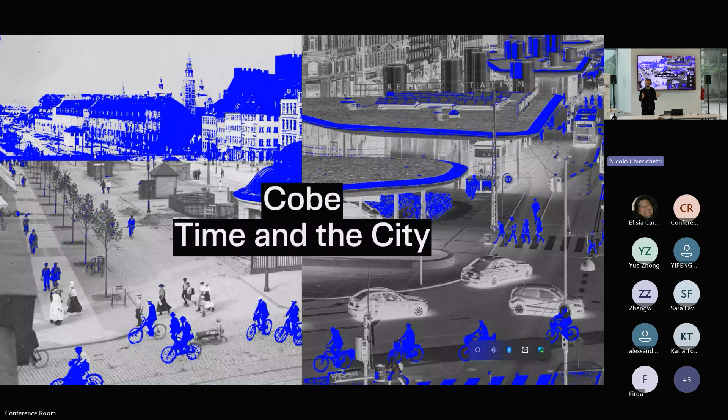So at the core of all of this, the urban environments, I think it's so important to discuss how infrastructure and mobility shape our lives, shape our society, and how important it is that when we invest in mobility solutions, in infrastructure, it's really part of shaping our daily lives.

So looking back at the core of all of this: why did we start building all these cities some 1,000 years ago? At the core of these discussions lies the very important promise of creating good lives for the people living in cities, and I think we should remember that in our work. The way they started structuring the city was around the experience of time—how much time it took to get from home to work, from home to school, etc. That became the base for the discussion of building infrastructure and mobility within our societies.

Then, 100 years ago, there was a major disruption—the Holy Highway, the highway to anywhere, where suddenly distance was not a problem anymore, because we invented the car, we invented the highway, so we could live far away from the center where we might work or go to school. This created a massive sprawl. The city started growing intensely across the landscapes, and we've continued that tradition and are still doing so. I think that's a major problem for thinking about a more sustainable world—we really need to start rethinking infrastructure, and that modernist project and lifestyle around modernity is at the core of this question.

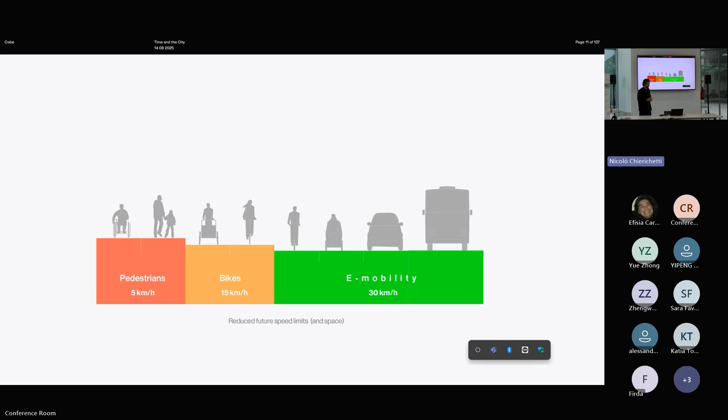There's a lot of thinking here that we could learn from, and we did these collages on rainbows of mobility, where we start looking smarter into all these smart mobility forms, and rethinking the usage of all the infrastructure we've already built.

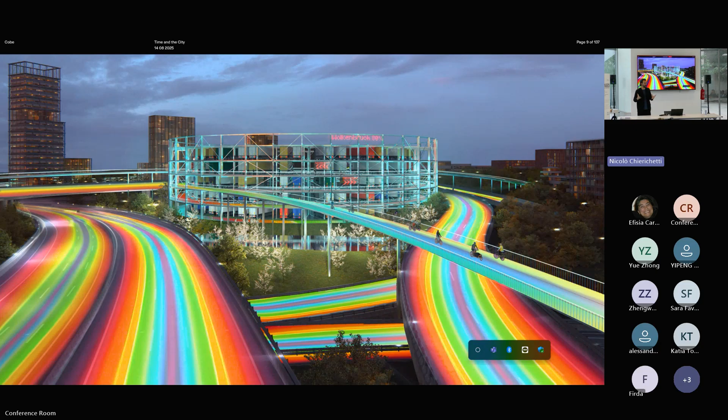That is also to really tackle the problem of not invading more natural landscapes than we already have. But when we talk about urban life in relation to natural life, we actually need more time within nature. We need to slow down more. We need to have more time for thought.

I'll just shortly tell a bit about our office. I don't know how many of you have been to Copenhagen within the past five years or so. Okay, not that many—that's good, then there's something to tell. But you should really come and visit. I think it's an interesting case of a city that completely changed over the past 20 years. But I'll get back to that.

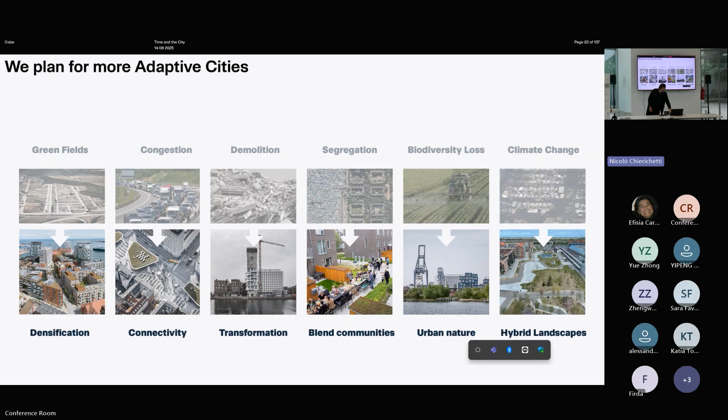At the core of this, we use Copenhagen and we learn from Copenhagen. We talk a lot about how the city transformed, especially around mobility, the core of it being the bike culture of Copenhagen that became a core new narrative, but also how the city changed its landscape. The harbor of Copenhagen is completely swimmable now and has become an enormous new recreational quality for all the inhabitants of the city.

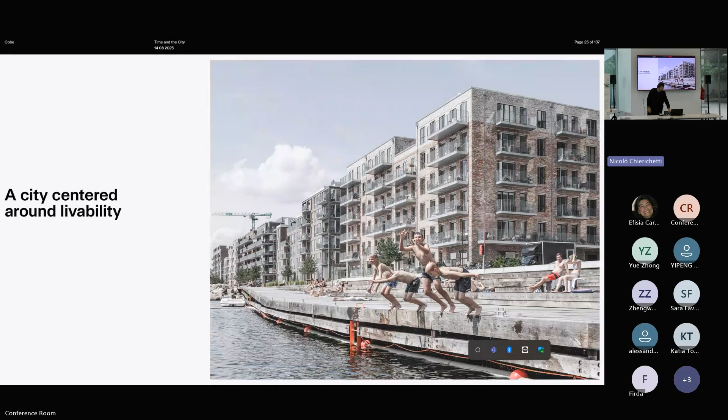In the back, you have the first public harbor bath built in Copenhagen in 2002. That has been multiplied—today there are over 30 harbor baths within the urban blue landscape of Copenhagen, creating this enormous playful landscape for the whole city and guests to activate around.

I'll give a brief introduction to Copenhagen because I think it's important to discuss the situation on demographic levels and so on. You can see the forecast of Copenhagen is still growth in the future, and that has been the situation for the past 30 years, forming the baseline of how Copenhagen's growth keeps thriving in many ways.

But there's a lot of discussion on how you grow and what you build for, also creating an affordable city where there's room for all kinds of housing. To understand this, you need to look back in history into a very important framework—the finger plan of Copenhagen. I think that's a historical framework for understanding why we can do what we do today in the city, but also the boldness and braveness of doing a regional master plan that becomes a political instrument to steer the growth of a city.

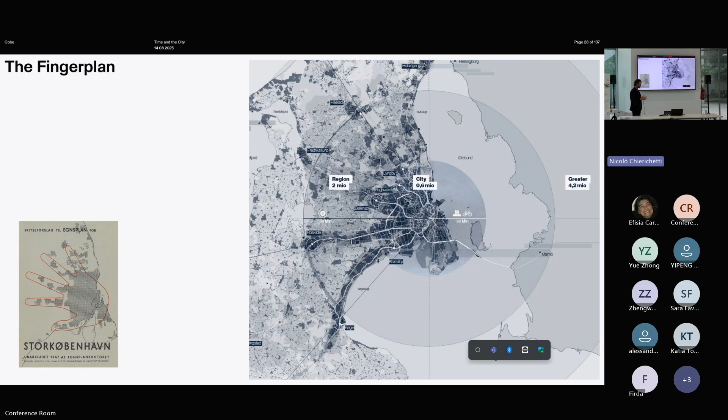Within this lies the idea of having the center of Copenhagen connected to an S-Bahn train system. All of these fingers were planned since the 40s around mobility at the core—so transit-oriented development. That is part of, I think, an interesting story of growth.

Looking back in Copenhagen just before the Second World War, actually there were more people living within the municipality of Copenhagen than we have today still. And people lived very differently, very compact and not in very healthy housing and so on.

And then you can see what happened around modernity thriving here in the 50s, where everybody fled the city into this new finger plan, and the whole suburban sprawl with modernity started thriving around Copenhagen. The good thing is that all of these suburbs are connected to this train network of the finger plan, so it's still well connected in terms of connectivity and transportation.

We see now towards maybe 700,000 people around 2030 as the growth prospects. So still, we are not even close to being the same amount of people as before the war.

And there are a lot of different stories in this. One of them is, Copenhagen used to be known for the Little Mermaid for many years. It was a kind of urban icon of the city, but a very small urban icon, also a bit silly back then. It was stolen several times.

And that narrative has completely changed in many ways, because now people come to Copenhagen to try the bike system, to be part of this new livable Copenhagen, where it's more about the lifestyle of the city that you visit more than seeing the Little Mermaid. And that's become a folkloric movement that everybody just loves to be part of, a cultural movement that everybody is proud of in the city.

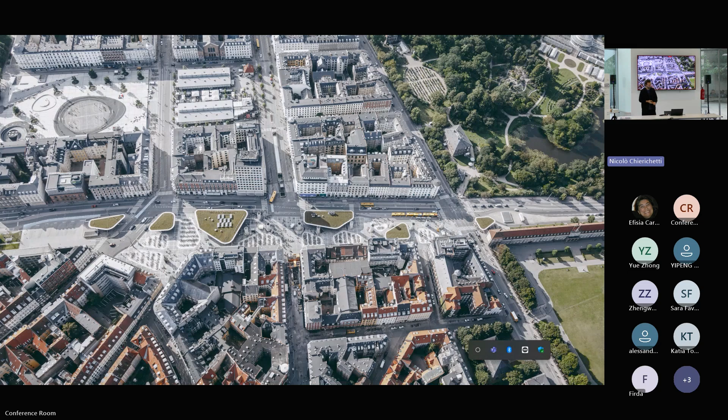I'll just shortly tell about one of the projects I was myself involved in back in 2007, when we did this project for the new Nørreport station. This is the busiest station in Denmark, with around 250,000 people passing through every day.

The idea for this was basically to track all the pedestrians, all the users of this core of Copenhagen, which is the central mobility hub between trains, buses, metro system, bikes and so on. So we tracked all the people's flows.

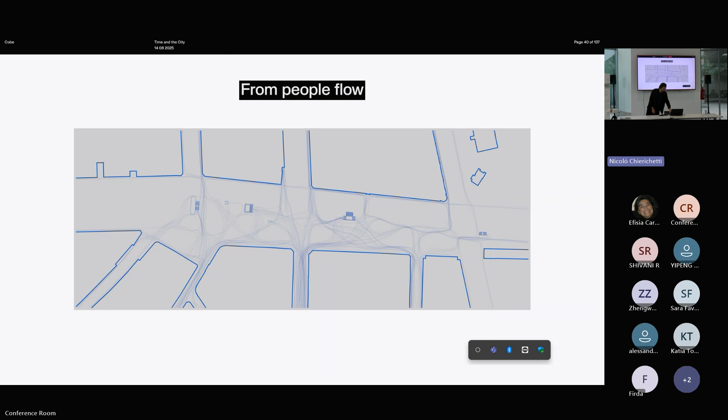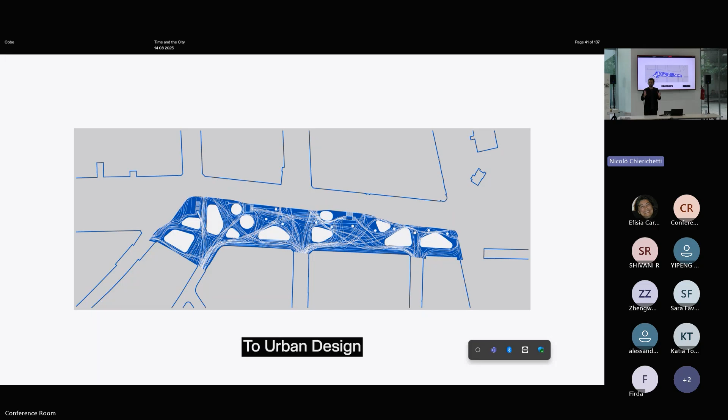And within this flow drawing, we designed these islands where we could then place the necessity for bike parking, but also the necessity for stations and so on. This simple gesture of tracking people's footsteps around the area framed these islands we could then develop and program with all the bike parking.

And then the whole exercise around designing new bike parking became this project about just lowering all the bikes 30 centimeters. One of the main problems with bike parking is that they keep stacking up and become chaotic. So just by lowering these 30 centimeters, and doing a lot of design exercises on how to maximize and do super compact bike parking, we managed to solve this chaotic situation.

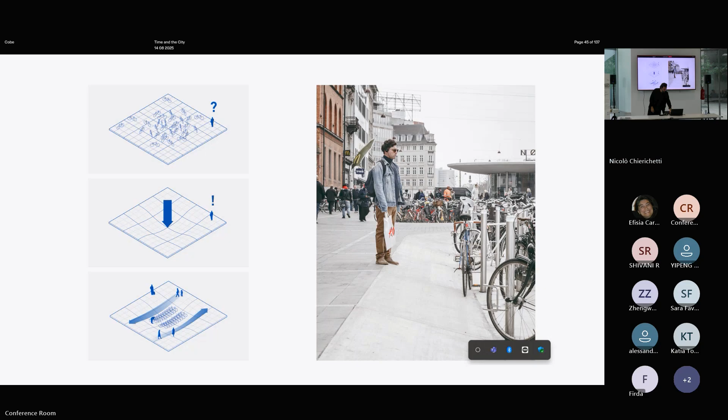Because if you put your bike here on a slope, it would basically tilt, so people actually don't do that - they stick to these islands. It's a very simple gesture, a simple landscape design, that actually keeps these enormous pools of bikes within designated areas. It's also creating an interesting flow space that people love to bike around, skate around, and so on.

It's also become a social hub within the city, where stations should be nice, open-minded social places where you can hang out and take part in the urban space at day and night. So in many ways, even though this place is quickly worn down, if you visit Nørreport today, it looks pretty used, even though it's only 10 years old.

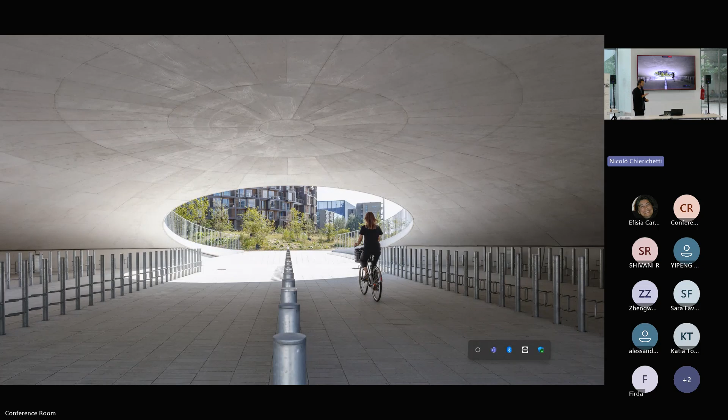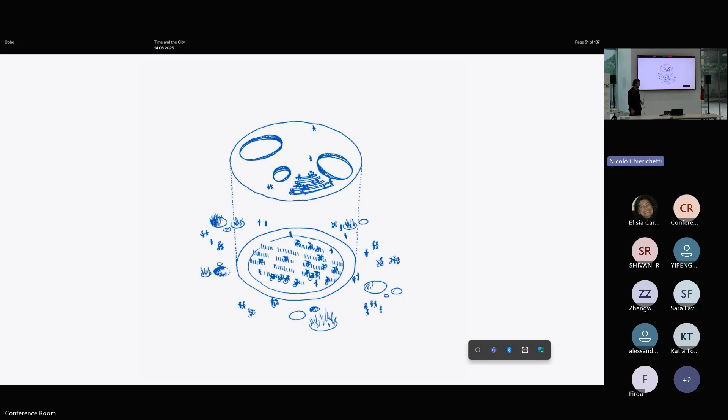So we reorganized the whole plaza into this dynamic landscape where we put all the bikes underneath these hills, and reframed the Nørreport design, which is also part of it - open bike beds. But then we put a lid on some of them and created what we call the innovation or learning landscape of Copenhagen.

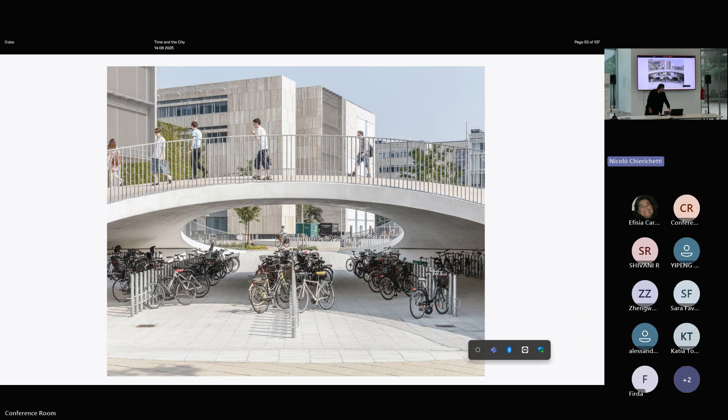Which then becomes places to sit and hang out and move. And underneath, we have these bike caves for bike storage, sort of covered underneath. They're also being used for multiple other things, events and so on, on the plaza.

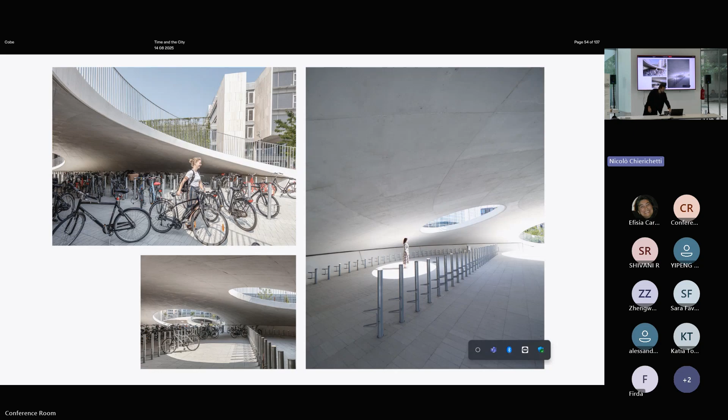There are these beautiful sculptures and spaces within the campus to use for many different social purposes and also learning situations. There's a sort of amphitheater scene here on the sides, so you can also do outdoor education or have a speech or a talk.

And then it's completely merging with the green landscape of the nearby big nature park of Amager. And like that, it's merging completely. Over here, it's also merging different functions - you have student housing together with the faculties and so on.

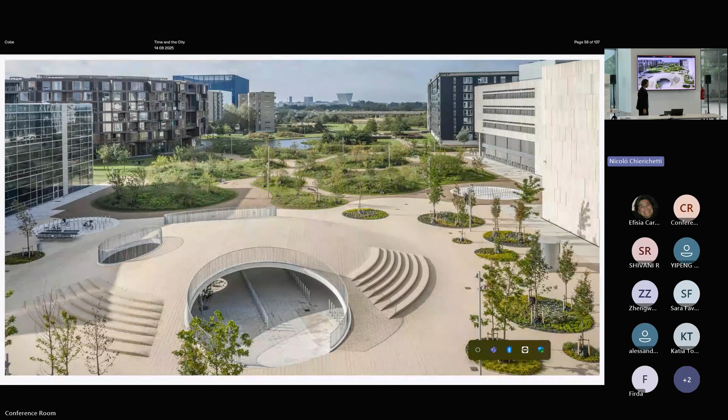So it's sort of driven as this moon-like landscape, I think, to drive around. It's really fun as a bikeable plaza - it's a playground for bikes and people to hang around within, and highly functional also.

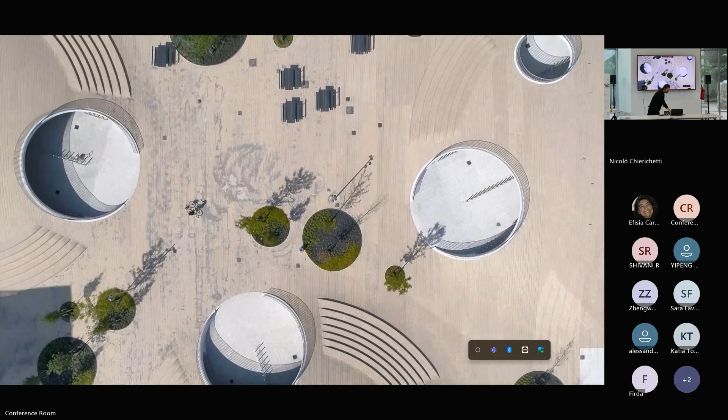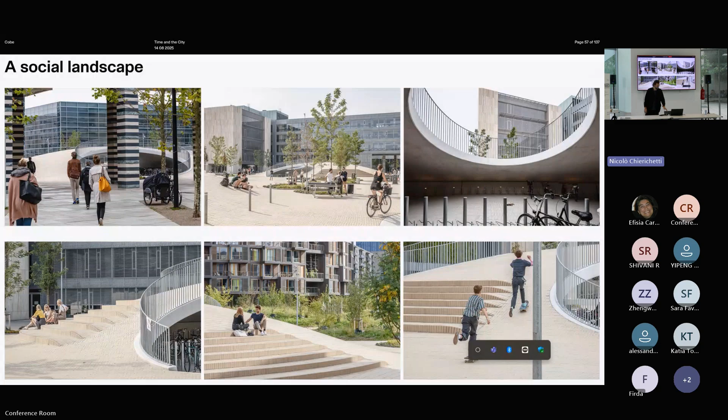Again, the importance of when we do these big investments is that it also has a social impact. It creates a meeting place, a sort of dual functionality, and a hybrid, taking care of several things at the same time. And all these caves can sort of cover other meeting points and social landscapes for people or young people to meet around both bike culture and learning at the same time.

So from this, I'll take you to the North Harbor, this enormous project, and talk a bit about the 5-minute city concept. You probably know the 15-minute city from Carlos Moreno, from Paris, which is sort of the same idea. It was actually developed around the same time, in 2010-ish.

But the North Harbor is a really long-term plan - it's a 50-year planning perspective. It's a huge plan that's going to inhabit 40,000 people in the future and 40,000 workplaces. It's part of the growing Copenhagen, and it's part of what we call the eastern harbor of the city.

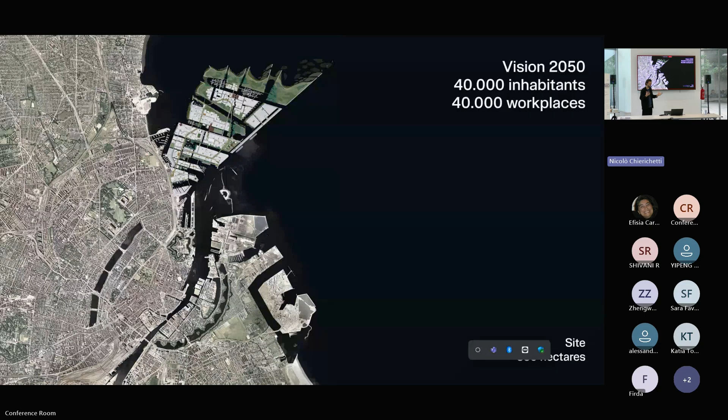There's actually a huge island being planned here as part of the future resiliency plan, so we're going to make sure that the inner harbor of Copenhagen is not going to flood the city within a storm or something. But that's another story.

But I think one very important part of this is, talking about bike culture, how the investment in a new metro system in Copenhagen has become part of a land speculation case, actually. Because all the land being sold out here in the North Harbor and other places is actually being transferred to the metro company.

So all the land speculation here is actually what finances the public transportation system of the city. A very important political decision was to connect the North Harbor development already from the very beginning to the new metro ring of Copenhagen. Copenhagen's metro is quite young compared to, for instance, Milan and so on, but it's really completely changing the dynamic of the city, that everybody can get around within a very efficient metro system.

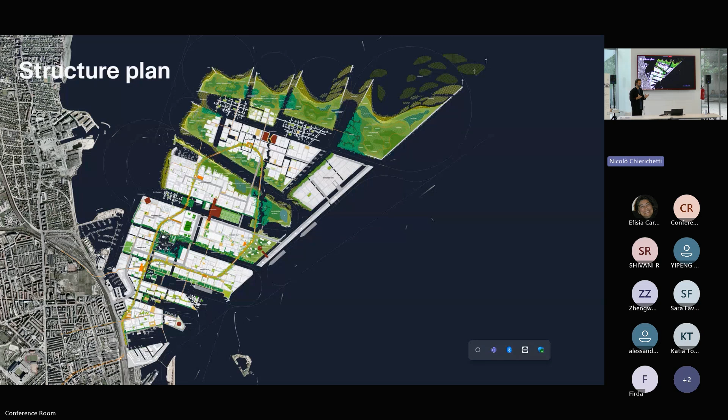Important is also that this system is linked to the bike culture, and that was one of the main concepts for our North Harbor project: to create a green loop connecting the whole development, from the early phases to where we are today.

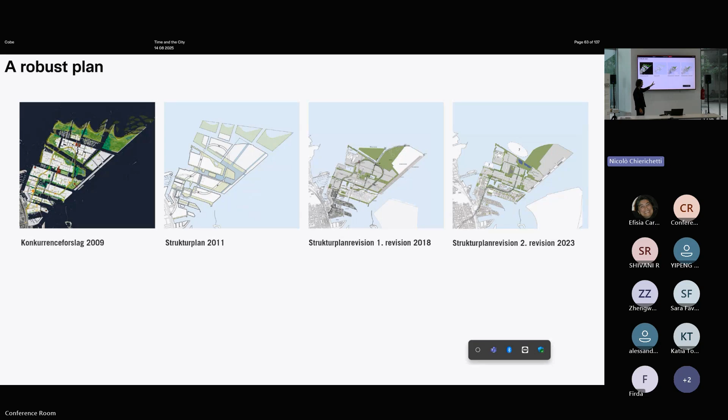This is also a very important instrument politically, as part of a flexible framework of the planning. We've revised this long-term structure plan 4 times now. At one point the loop was more like a question mark, but today it's actually going to be an end in the plan because there's no reason to do the full loop. A lot of discussions around that, but the bike path will still be the big green loop connecting the whole area.

This whole phasing strategy has really been the core of how to develop a solid and robust framework for such a long planning process. You need to develop it bit by bit. So the whole planning instrument works from building out one neighborhood at a time, one cluster at a time. That way, each neighborhood can frame its own identity, its own development, its own architects, and gain diversity over time.

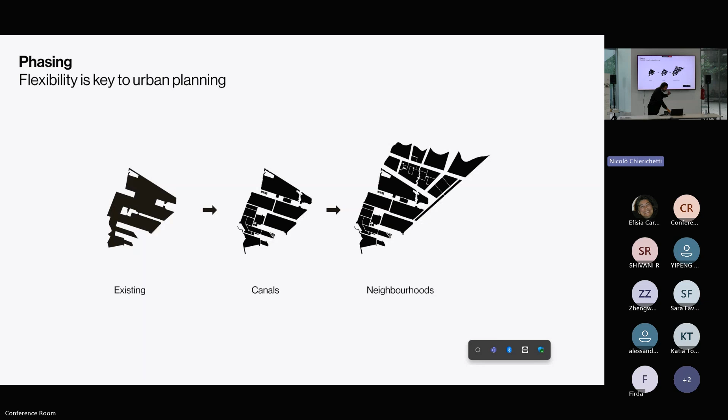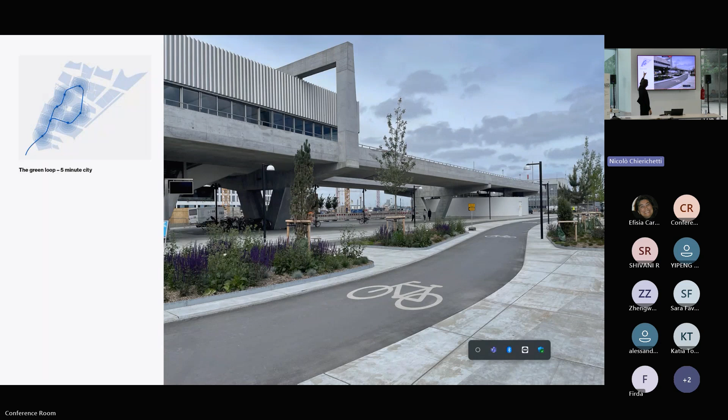Together with that main concept of the islands, there are 6 other strategies. I'll run through the concept of the 5-minute city as one of them, talking about connectivity. That's this hybrid mobility spine connecting a highly efficient bike culture with this new metro system, delivering proximity. You can see these small circles showing a 5-minute walking radius from each of the metro stops.

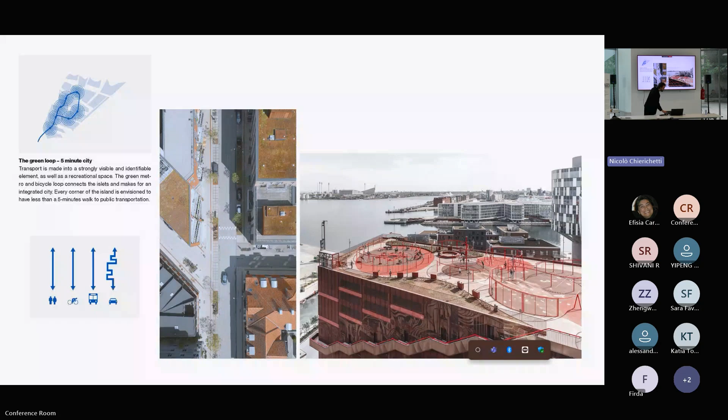And how we've designed the whole city around that, putting all the cars inside big parking hubs like this. It's not just a parking hub, it's also a playground on the roof, and a big fitness playground as well. You can see the first metro station we designed, right next to our office over there.

So in general, there's plenty of space for cars in North Harbor—there's 1 car per 200 square meters of built environment. But they are not favorized in the planning, not planned to be efficient. So taking a car will always take more time than taking a bike or walking.

Today we have the first 5-minute city realized. There are around 5,000 people living in the area today. It's a complete mix—60% housing, 40% office. It's really a good case if you want to explore a 5-minute city, or the discussion on proximity within a neighborhood, using public transportation as nodes to build sustainable frameworks around. I think it generates a lot of good discussion.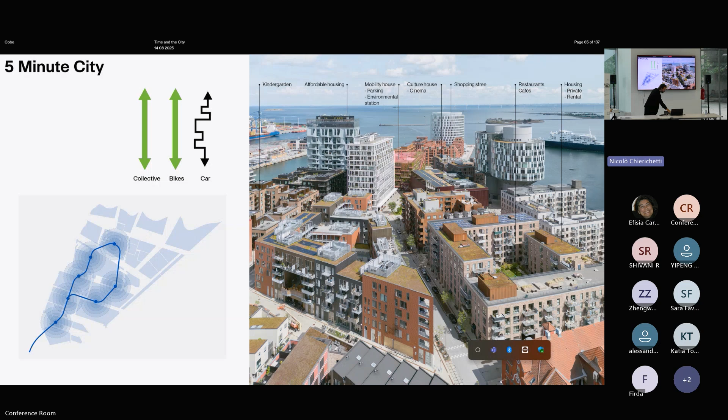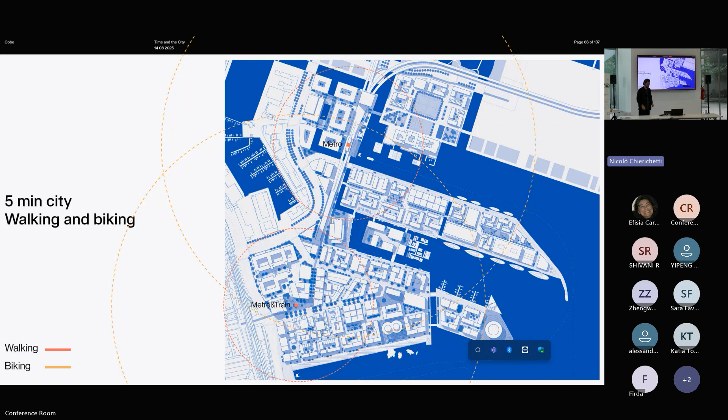There's obviously always challenges within these projects. I did a few diagrams showing how these metro stations work. Coming back to the bike culture versus walking culture—a 5-minute walk doesn't actually cover the whole area, but together with efficient bike planning, we cover the whole first-phase area with just these 2 metro stops. So it's this combination of mobility, micromobility, favorizing bikes and walking, creating highly efficient proximity and easily walkable areas.

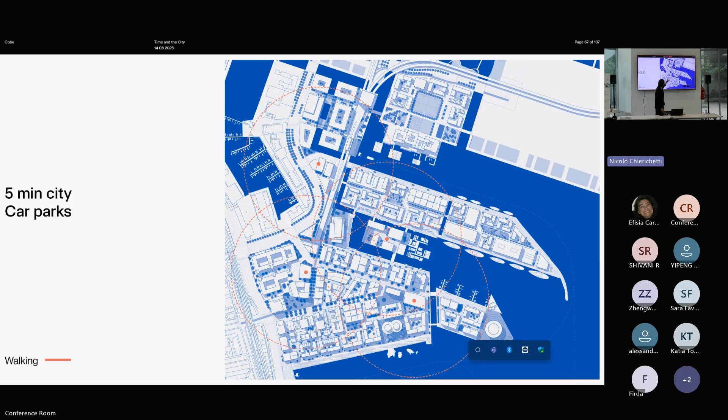Then there are also parking silos in the area—4 parking silos built already, which you could say is also a 5-minute city concept. Within 5 minutes of walking, it covers almost the whole area with parking facilities.

We just finalized a big playground underneath the metro line. So again, it's this double programming—really double using all the investments we put into the city.

I could really recommend going and looking at this, and in general looking back at how we started in 2009, keeping a lot of the historical urban mass of the area and densifying around that has become a major success.

When we talk about mobility, if you want to create a lively district and you facilitate walking and biking, you also get a lot of young people to the area, especially when you create a nice destination, an urban beach within the area.

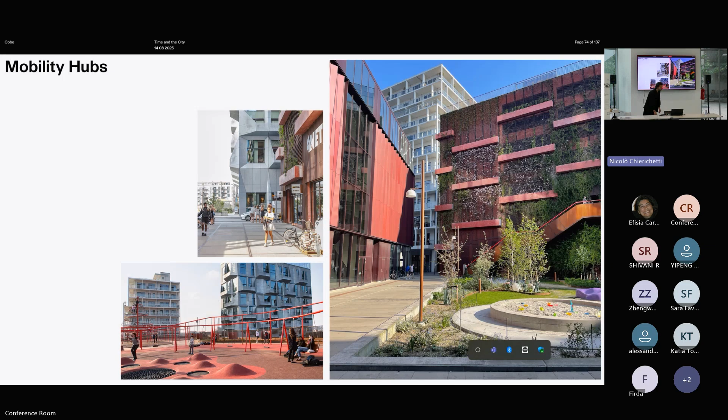There was a lot of these discussions back when we did this. You can really experience the car-free areas, and how the landscape is purposed for walking and biking because of these mobility hubs.

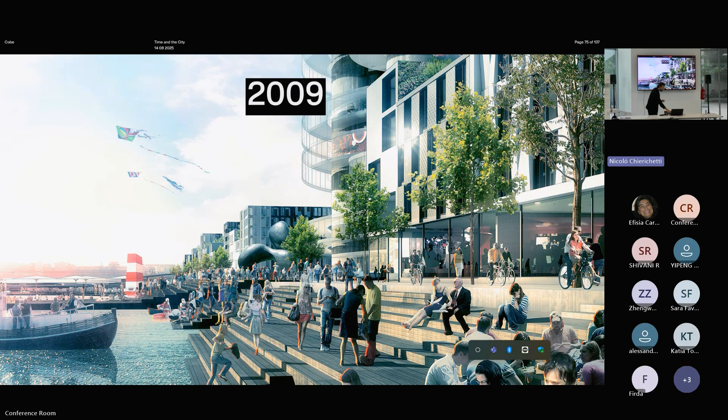It's good to look back at when we did these visuals back in 2009 - the politicians really didn't believe us that we could actually create all of this urban life that we were just showing in these fancy collages. But we completely proved them wrong. There's actually almost too many people on these waterfronts today, creating another sort of challenge for the area to thrive.

But anyways, it's this sort of planning instrument for soft mobility together with placemaking - I think it's a fantastic way of actually creating livable new districts and neighborhoods within our cities.

So I'll just take you to another project. It's another district in Copenhagen which we are doing the local planning for right now. And that is completely different because it's in the center of the city - it's an old railway, so a brownfield district again.

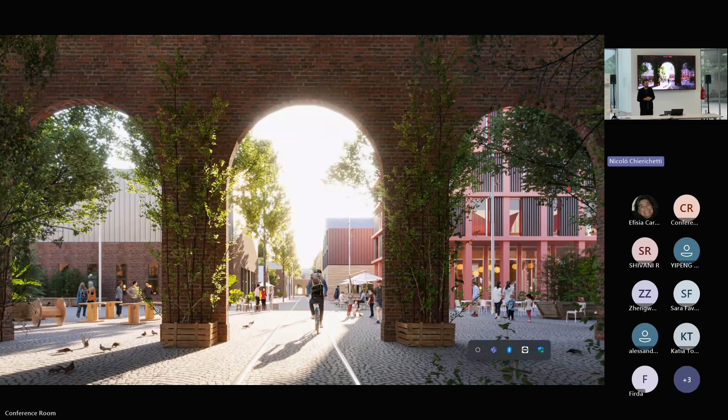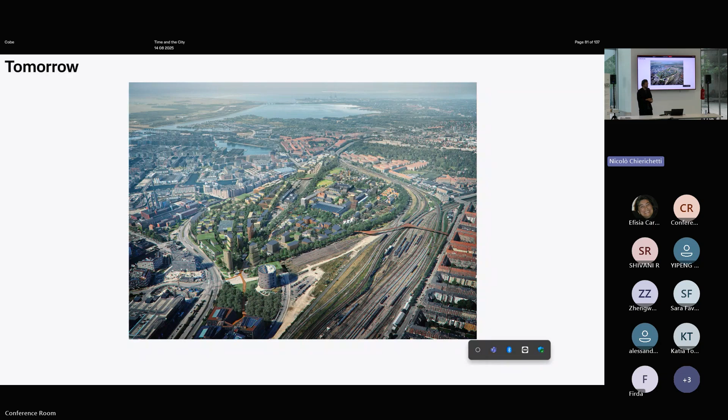So this is the vision of creating a super green district. And what we really work on here is how to create green streets. Anybody doing street design knows how difficult it actually is to do proper green streets because of all the infrastructure underground - the fight for space within our cities is immense, both underground and overground.

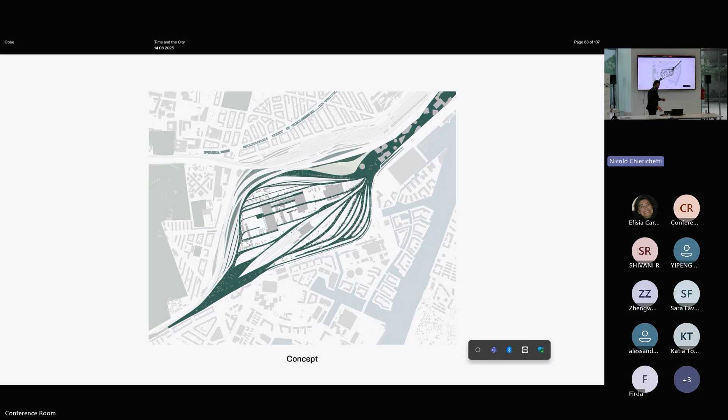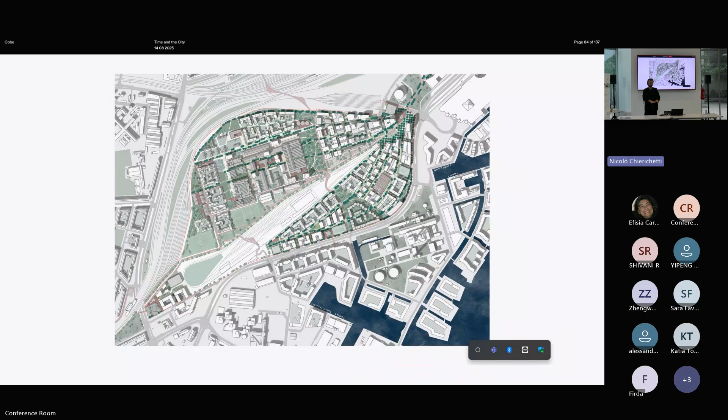So we've done tons of exercises here in terms of how to create really green streets. It's all about prioritizing where to put the wires underground and where to actually create a lot of soil for green streets to thrive. I have some sections in a bit - we call it infra-nature. That's a good topic for discussion.

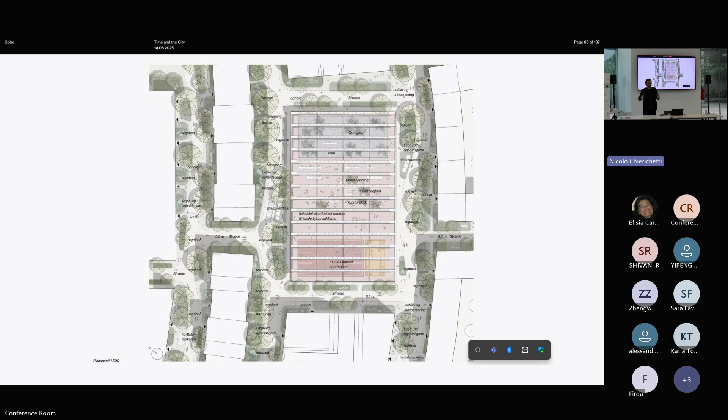Anyways, we discussed this - how to create green streets and how to frame a different section where there's space for the roots underground, so that the engineers with their cables and their massive pipes don't take up all the land underground.

I'll just jump through some of these. It's all about priorities - in some streets you have a lot of room for garbage transportation, for fire trucks, etc., but in other spaces you leave space for greenery.

This is another study we did in terms of designing streets for walking and biking - how to prioritize streets and how to study the safety distance around vehicles. What we found is that the estimation a traffic engineer gives on how many bikes and cars you can fit within a street changes - if you lower the speed of the cars, the safety distance around the car becomes way smaller, and you can actually add volume of people moving around these streets.

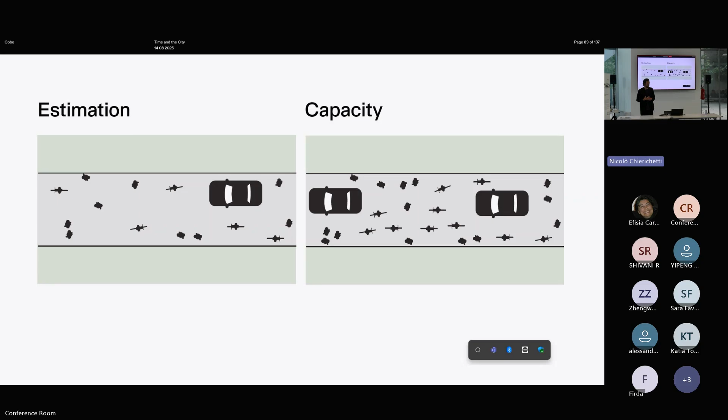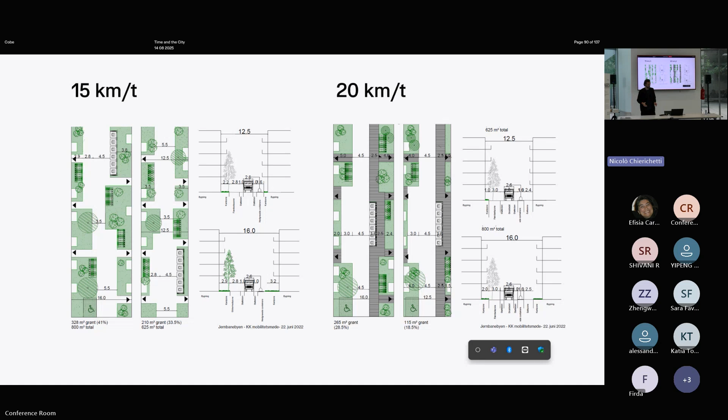So if you go down to 15 kilometers an hour, you will have these super slow green streets and urban environments that prioritize walking and biking, actually using the streets as public space rather than infrastructure. There's so much learning in this, how to redesign our infrastructure within our neighborhoods. We might need big, efficient infrastructure connecting cities and so on, but within our cities we can really transform neighborhoods into becoming primarily for hanging out and creating livable districts for the people in the city.

So that is really what we emphasize here. We start the development hopefully in a year or two - right now we're finalizing the local planning of the area. It's a major plan for 500,000 square meters, so an enormous local plan work. It's the biggest local plan in Danish history, I think.

Another project is about how to keep all the existing buildings on the site. We did a transformation strategy on every single building on the site, showing an idea catalog of how in the early phases it could be temporarily used, and how in the late phases it could be transformed to different purposes within the programming of the area.

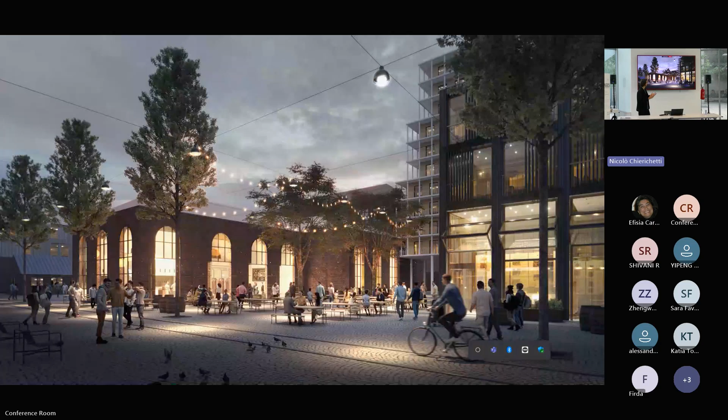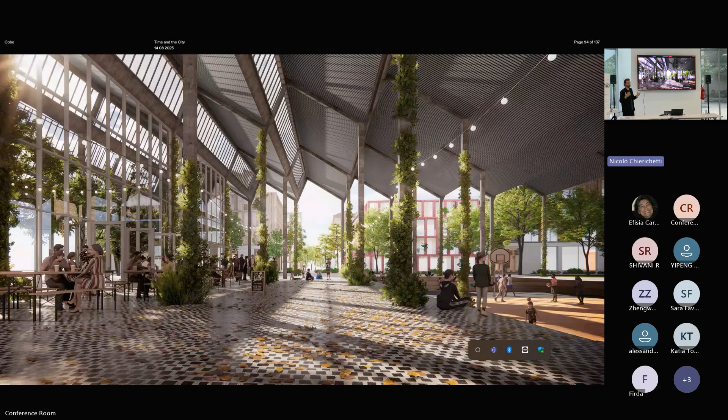Some visuals of how the transformation of one of these old factories will become maybe a brewery in combination with a big new school in Copenhagen, in the heart of the district. But also how maybe some of these structures could just serve as temporary urban spaces, covered spaces to create different places for activity within the site. In general, we hope we can create the greenest district with the most amount of greenery and trees per square meter in Copenhagen. That's at least our vision.

We're trying to get the politicians to sign that as a vision for the future of the railway district. Now, finally, I'll just zoom out a bit. How am I doing time-wise? Good? That's good.

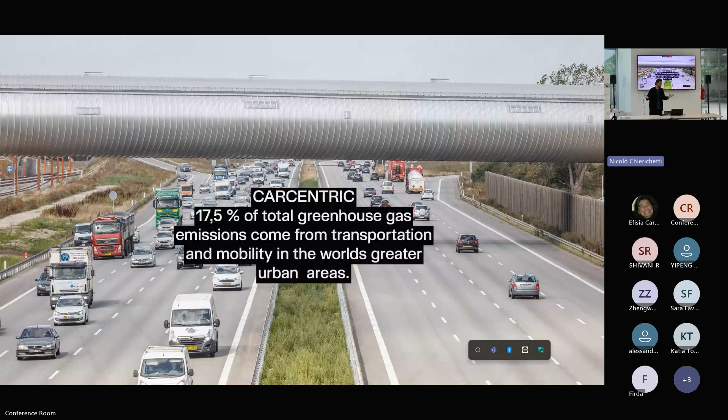So there's a lot of work to do, a lot of projects to actually enhance the transition from cars to collectivity. This is one project we did, on one of the main arteries entering Copenhagen from the south. We did this major transportation hub, called Køge Nord, which also serves as a bridge between two growing neighborhoods in southern Copenhagen. So it works both as a connector and as a transition from road.

There's a huge car park here, so you can go to this point and get directly to Copenhagen in 15 minutes. So it serves as this transition tool, also culturally. But when you make these investments - enormous investments in high-speed rail and so on - it's important to also create nice urban spaces within these stations. So it's both a transportation corridor, a bridge, a station, and a space to hang out. It's also become a landmark for the community, looking at having more sustainable transportation linking the community with Copenhagen.

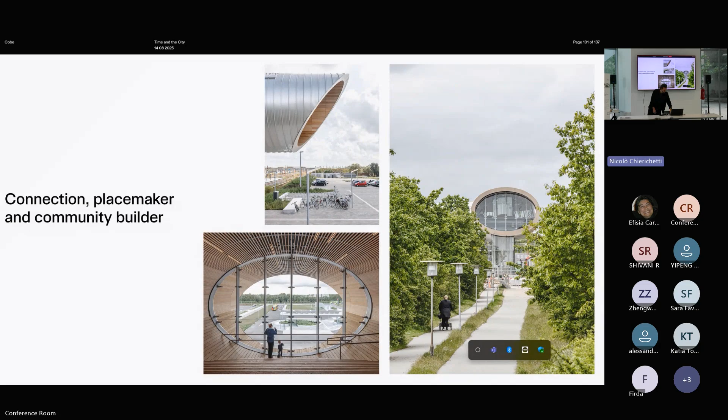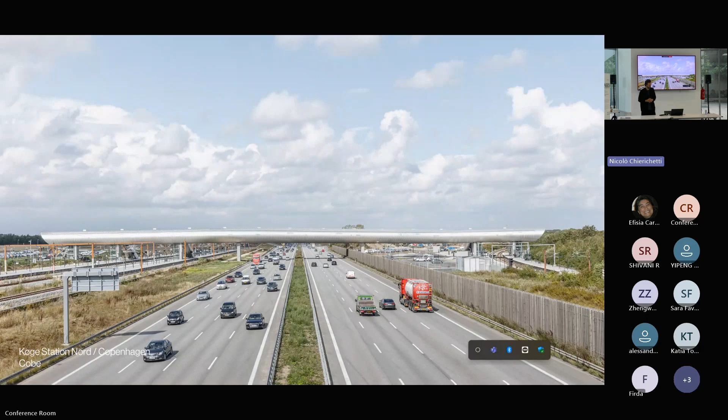One project that, in the future, we'd hope it's not just for people deciding to stop, but if you actually made a paywall underneath this bridge, you could force way more traffic into taking the train to and from Copenhagen. So this is one project moving out in the circles.

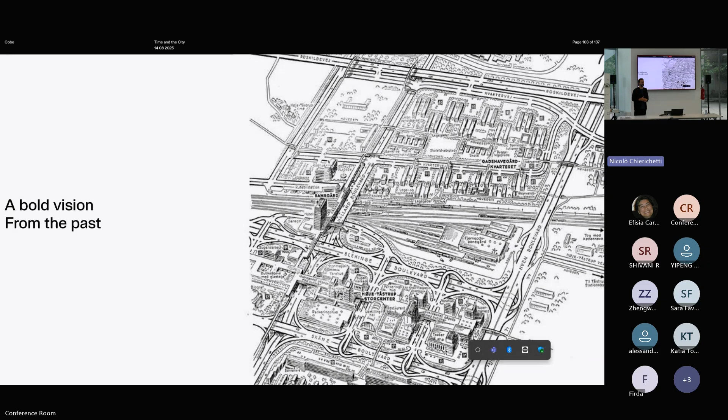This historical development, which we did the master plan for in 2010 or so, is finally getting realized. It's basically one of those famous suburbs planned in the 70s and 80s outside Copenhagen, framed around enormous modernist visions of the future - how Copenhagen would grow and how this would be a new enormous city center just outside the existing one. But these plans never really got realized. They built all the infrastructure, but building new cities is so insanely difficult in terms of creating nice urban culture and nice districts. This is within the finger plan.

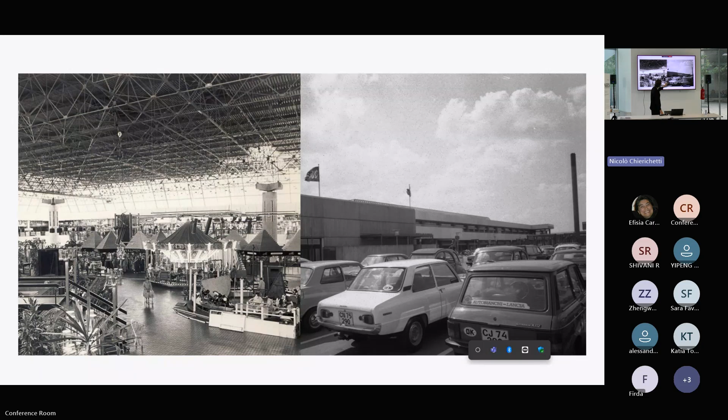It's located right here, and it's really been suffering for 40 years since it was developed. They started, of course, by building a big mall - one of the first urban malls in Denmark, which sort of sucked all urban life into this box, so nobody needed to use the streets around it. And then they served it with massive American-model car parkings.

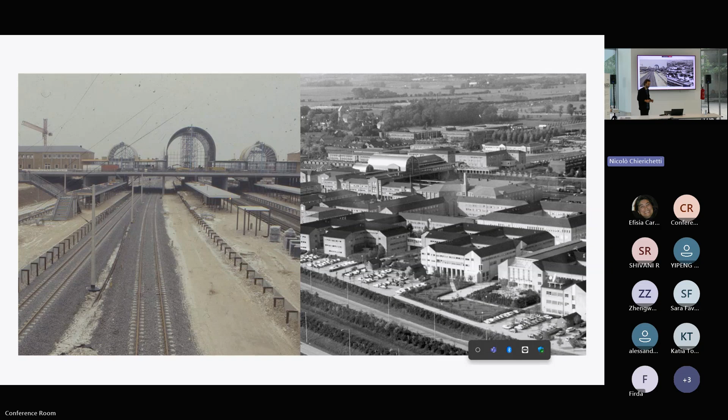And then they did a super monofunctional planning with a big office area right next to it. They did everything wrong besides one thing: they actually planned a really nice, huge regional train station connecting Copenhagen in 20 minutes. As you can see, it's super postmodern in terms of its design. It's one of those love-hate objects in Copenhagen architecturally. But it's super efficient because it connects the area with the city.

There's a lot of political discussion around Høje-Taastrup, how it's never really succeeded. And now they're trying again to build a city. But now we see the framework actually shaping, and our master plan from 2009 is showing its works.

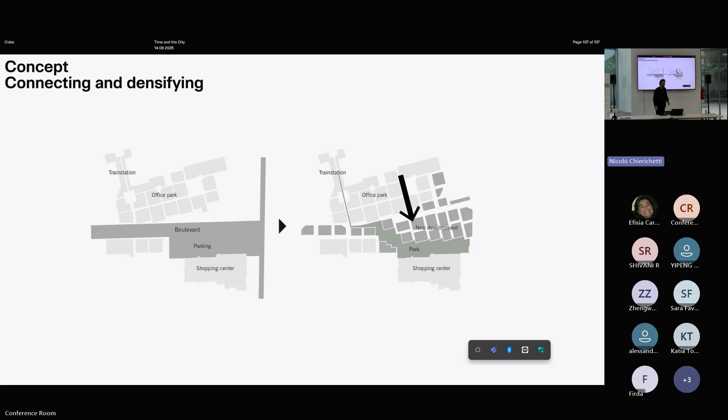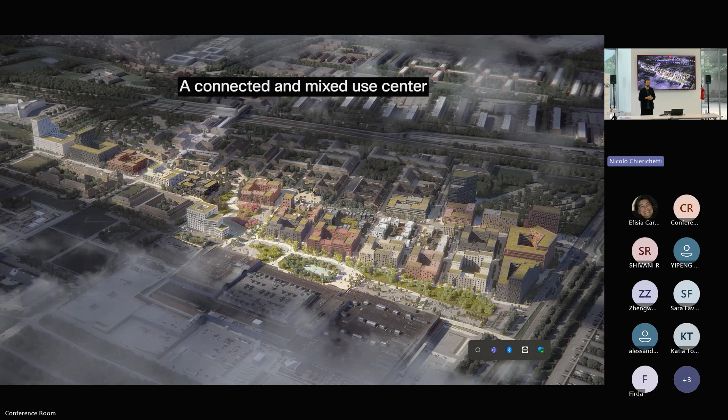Basically, our idea was to take all these monofunctional areas, densify and go from boulevards to a new development of housing, and then connect the train station with the shopping center with a new urban park, creating this new hinge and new major quality of the area. So it's a complete densification around the mall, which was actually really suffering in terms of visitors, which is now changing. But it's also densifying an old office district with new housing.

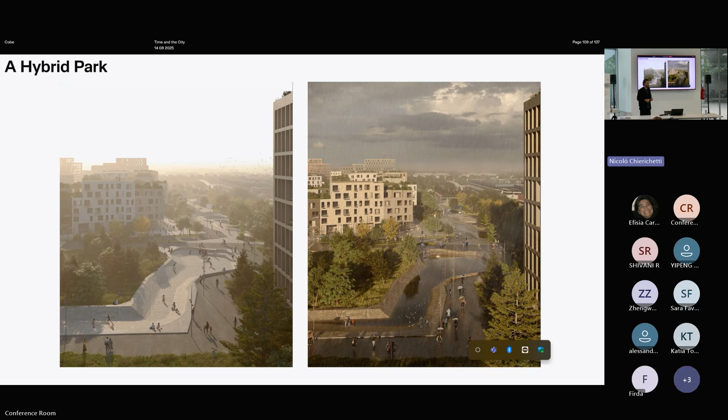One of the big challenges, how to finance these enormous landscape projects, is also always a super tricky part. For this one, we actually managed to take all the infrastructure that's usually put underground, all the pipes, the whole engineering works, worth around 20 million Danish crowns. So instead of building pipes, we took all of the investment and put it into making a big playful river to handle surface water in the future. So from investment in pipes to becoming investment in a park area, that became the core attraction and the main design driver for the area.

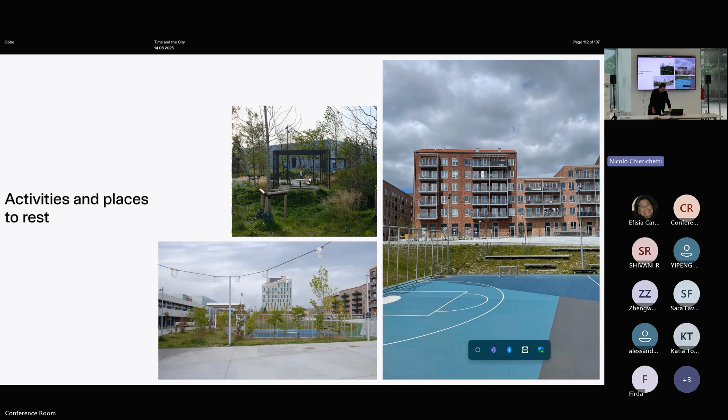So we made this enormous skate park, or not only skate, street sport park, at the heart of the area, connecting different areas. We worked together with Rune, who's a world famous skater, and did this combination of park and street sports within the area, creating activities and places also to rest, connecting the area to the other connected areas.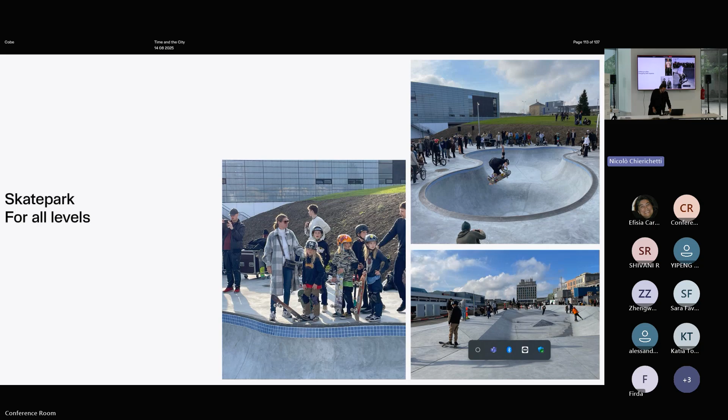So we made a skate park, which is obviously for all levels, together with Rune and his partner Glifberg. Don't know if you're into skate culture, but he's a famous figure in some of these skate games—he's even become an animated figure. They did this skate park design company together, and they've helped design skate parks all around Denmark and also outside the country today. It was extremely fun to work with them.

I think on the design part, Rune Glifberg draws his own weird designs, skate tags and different edges to skate on. But what was even more important, I think, was that branding potential around Rune and his global skate community, because he's such a famous skater. He actually managed to create Copenhagen Open in Høje-Taastrup, in this enormous skate park, attracting skaters from all over the world to come and join the opening of the park. So I think now there are more global skaters knowing Høje-Taastrup than Copenhageners in some way.

What we still lack is how to nail the everyday life and liveliness around the park, but it's slowly growing. They built a new town hall in the middle of the park, so the mayor can sit and watch his urban life slowly growing. He's very happy about the development, and he's even learning to skate, he said.

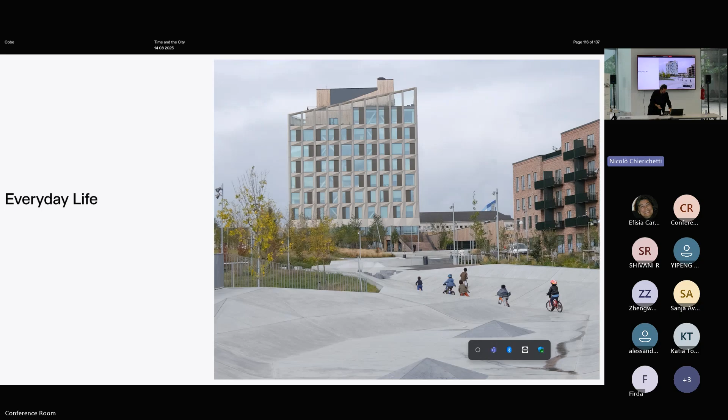So there's a lot of stories and good vibrations around doing playful landscapes as part of these urban developments. One thing is the skate park, but it's also strengthening the network of biking and walking, connecting areas all around this new central area throughout these green different landscapes. So it's really enhancing a much bigger area than the project itself.

Yeah, and then there's this funny story. Actually, we were invited to rethink the mall here because they could suddenly see the benefits of being part of an urban development and a new park. So since the park opening, the visitation within the mall actually completely changed. And I think, even though I'm not a big fan of mall culture, there are a lot of these huge modernist malls around the landscapes of Europe.

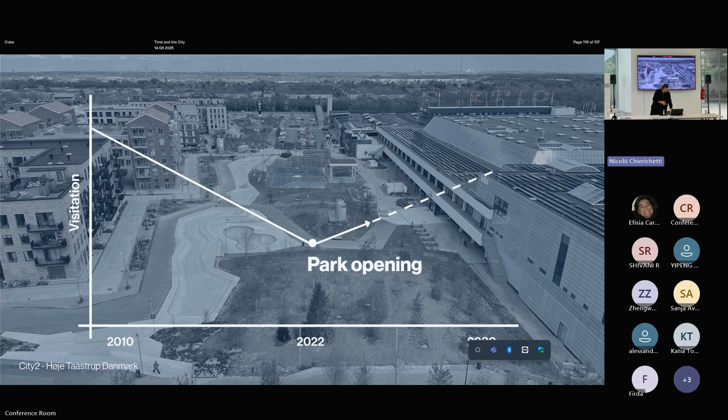A lot of them are neglected. A lot of them aren't making money. So how we can transform either the malls or the areas around them into new urban districts—there's actually an enormous CO2 portion to save from tearing it down or whatever else would happen. So I think there are good stories here in Høje-Taastrup on several levels.

Yeah, this is how it looks today. I'm more or less at the end, but I'll zoom out on a research project we're doing, which is part of looking into the Finger Plan 2.0 - what is the future of Copenhagen, and how will Copenhagen be driven around this whole climate agenda, but also the relation between Copenhagen and Sweden, which southern Sweden is right next to.

We did a finger plan with 6 fingers, where we take the relation to Sweden way more seriously and try to frame a new storyline, which is not about modernism and modernity, but actually about the natural impact we've had for so long, to put that upside down. Instead of drawing infrastructure for cars and trains, we did a big infrastructural project for nature, so the nature can correlate.

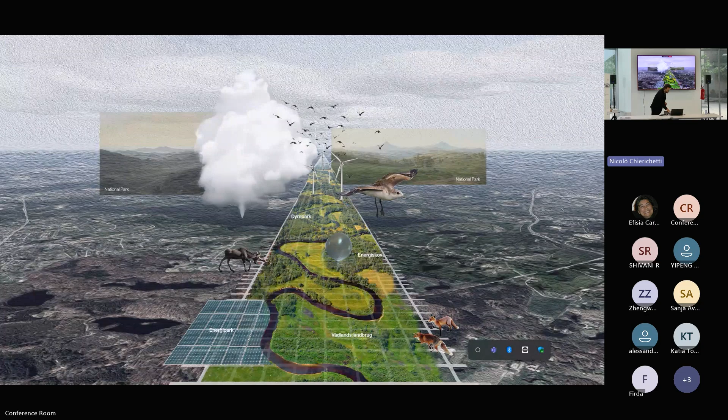We did enormous research on the whole landscape in the metropolitan area to see how a natural water flow would be connected around the area, creating a framework for a blue metropolis around the Finger Plan. We did some collages on how to let the water rule, following the existing water streams to create a vision for climate islands for different uses, and energy parks as well.

I think a very important point here is, if we look at this old infrastructural network that's already built, we actually connect not just Copenhagen and Malmö, but a number of cities - 3 million people within this network. But the network is not super efficient; there's no shared traveler solution between Copenhagen, Denmark and Sweden.

At least it's not super efficient, and it's expensive. But if we invested in connecting these areas better in the rail network, created better stations around the area, we could emphasize sustainable development at a regional scale - a completely different way of looking at not building more new cities, but actually using what we've already built.

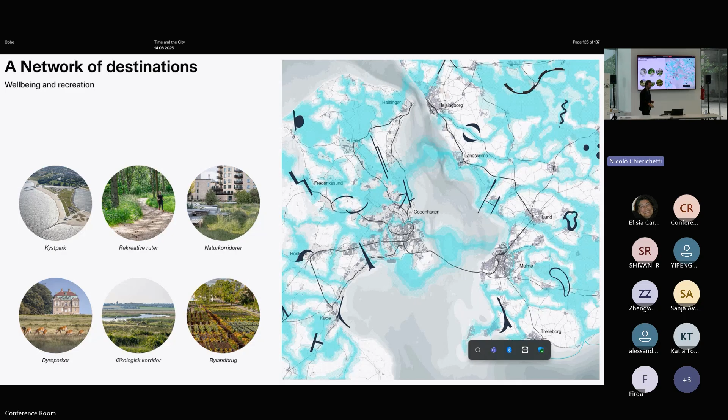There are thousands of housing areas within the whole network of the area, so if we created better connectivity, we could frame a more sustainable future around reusing existing housing masses. Together with that, using the existing train network to create better destinations within the landscape, and a much richer recreational network for people to use the landscape qualities of the area.

We did some more funny collages, really looking into scalable solutions across urban space and product design towards urban solutions at a large scale. What we hope with this is to frame a political vision that could create this sixth finger connecting Copenhagen and Malmö, pointing towards a future where we might not have to plan for more city, but actually connect existing cities.

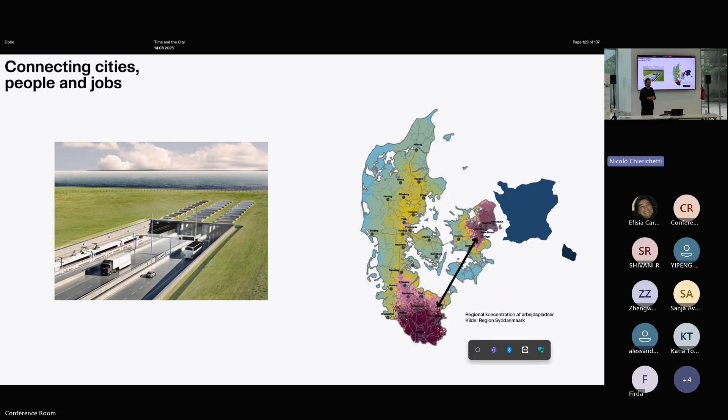Next to that, looking at a very political map here - job markets - there's a new mega connection between southern Denmark and Germany, which in the future with the Femern Belt tunnel will connect Denmark and Germany, or Copenhagen and Hamburg, much more efficiently. It will completely change the dynamics of the region.

Hopefully it will also change this enormous urban corridor going from the Nordics all the way to Milan, to Rome, and maybe together with the Brenner Tunnel - an enormous tunnel project - once that's finalized we'll have an extremely efficient corridor for trains going through Europe, connecting all these urban points in completely new ways.

There's a lot of connectivity thinking and investment in better stations and station areas that could be extremely interesting to build a network around. There's this TEN-T network, which I call the master plan of Europe - a framework made by the EU which I think is really interesting to look into, because within this network there are these super important investments.

I don't remember when the Brenner Tunnel is done, but the tunnel between Copenhagen and Hamburg is done in 4 years. All of these investments in connecting the cities we've already built are going to create a more dynamic, and hopefully healthier and well-connected, Europe in the future.

So I think there's a lot of interesting mobility aspects in this, and how economies are completely triggered by these infrastructural investments. So we don't have to grow our cities more, but actually connect them more efficiently. And I think that's looking into a future of maybe a broader collectivity.

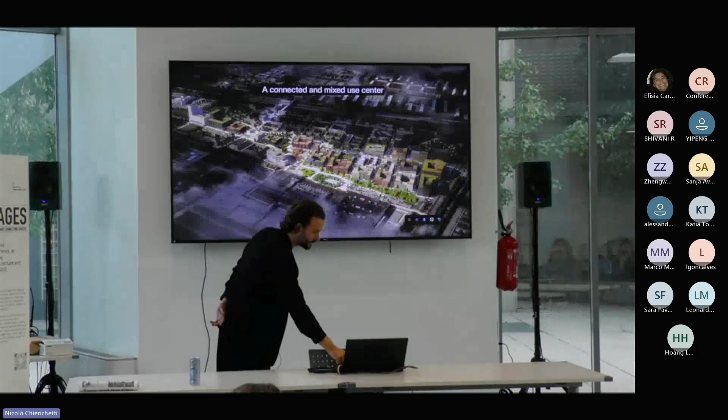I think being in a city that's rather new compared to Milan, or if you talk Italy, Rome, you have these historical palaces and beautiful spaces that's been worn in for centuries. We have very few of those in Copenhagen because we are a very small country that now finally has a big city. So that's about time and layers of the city. We don't have that authenticity in a lot of our spaces yet.

We are trying to take care of all these layers of industrial culture and use that. I just think we have a tendency in Denmark to over curate maybe, and we have a very big design culture. We're also quite a wealthy society, so there's a lot of money put into this, and sometimes it ends up being almost too nice.

But there's a lot of focus on creating spatial spaces for social cohesion. There's a huge affordable housing program in Copenhagen and Denmark, 22% of housing in Copenhagen municipality is social, affordable housing. So there's a lot of discussion around these things, but the urban space compared to being here in Milan is a completely different world in many ways.

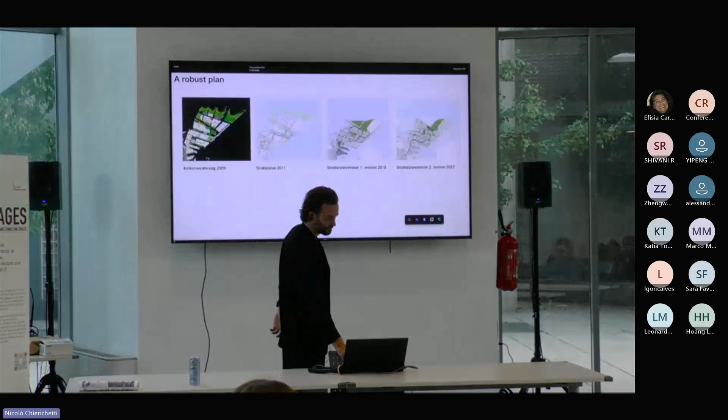The topic of bike lanes, for example, and student housing is connected to the population. There's very few over 70s taking the bike on the green loop, it's a big difference, completely different. The average age in Copenhagen is 37 right now, an insanely young population. So a lot of elderly people have been pushed to the suburbs, seriously.

But if you look into the demography of Greater Copenhagen, it's a completely different age level. In the municipality the average is super young right now. There's also a lot of young professionals coming to work for Novo Nordisk or some of these big companies that aren't doing so well right now. But that has changed over the past 20 years completely.

That's a different agenda when we work in Høje-Taastrup, for instance, around these things. You know what the mayor wants? He wants the young families, that's the program we get. Design something for the young families to come, we do a beautiful skate playground for you - it's also politics. If we want to win the competition we need to get the politics right, otherwise we'll be the big loser quite quickly. So there's a huge fight for resources in the region, for people resources.

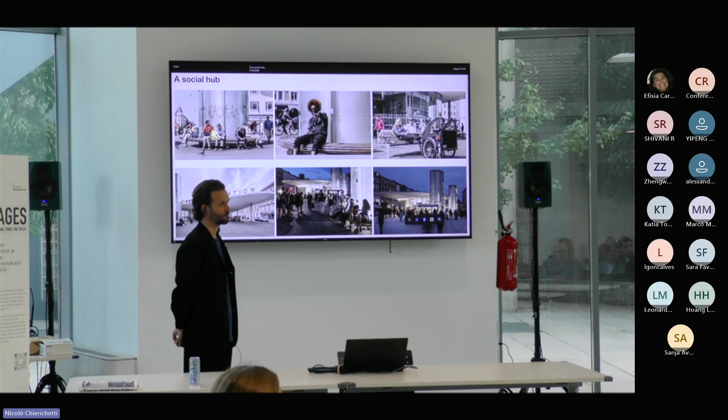But the metropolitan area is improving in population, really thanks to the migrations and movement in the world. So is Milan attractive for immigrants and others? It's not really the best situation, there's a transition in the ethnographic composition.

It's some totally different strategies than what I'm talking about here.